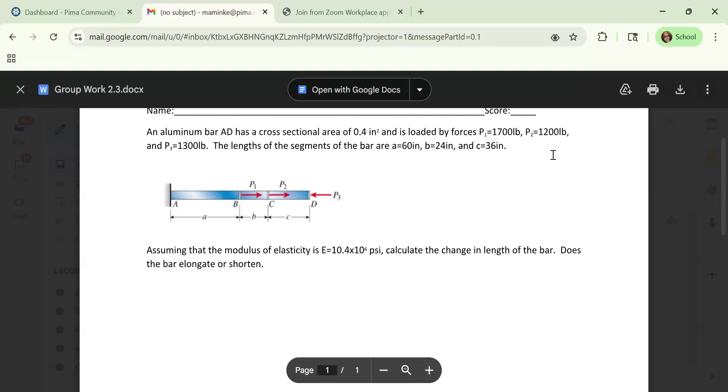Okay, I'm gonna share my screen with you, and I'll blow it up a bit. Here it goes. So I'll open a Dropbox for this. You can work on an individual piece of paper or you can take a screenshot of it.

Right, so this is where we left off last week. We do have a quiz today on 1.8. And then, as I said, we have a sample exam that'll also count for group work.

Okay, so the in-person exam will be Thursday during class, so y'all don't need to log in Thursday during class. Okay, the review session.

Did I give that to you last week? Yes. I'm so confused. All right, I revised it actually. I couldn't figure out why I had a half dozen copies of it.

You added prismatic segments. I added prismatic segments, yes. I added 2.4, which is what we're gonna do today, which I will be honest is not straightforward, so we might want to not have that on. And I added thermal misfits. Misfits is the wrong word. Yeah, no, misfits is the right word.

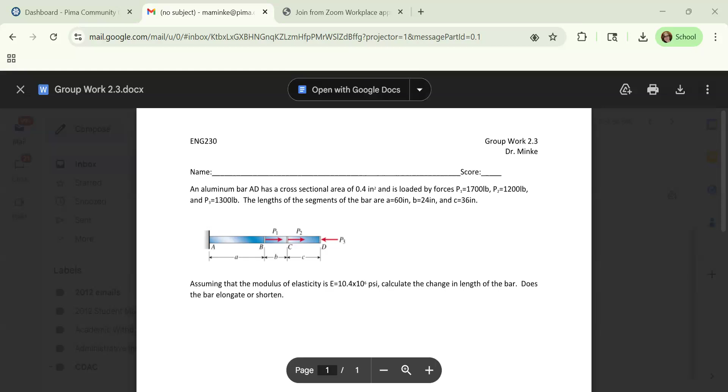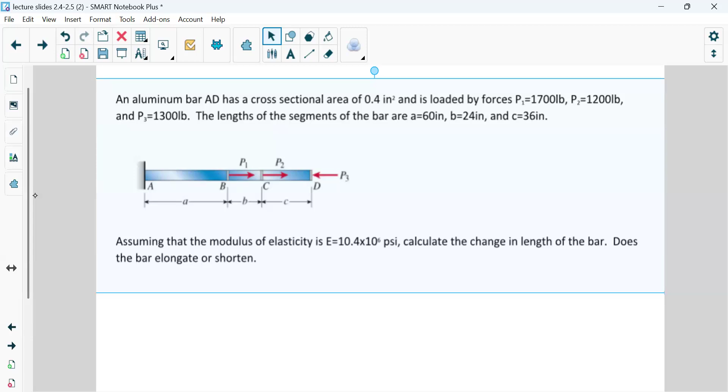So we have a non-working pen. 60, this one is 24, and this one is 36. I think that should be green, and it should have a much smaller thickness.

All right, so we're given the modulus of elasticity as E. Why is it E and not G? Because it's axial, it is not a shear force, right? And we also don't have any wiggle room with this.

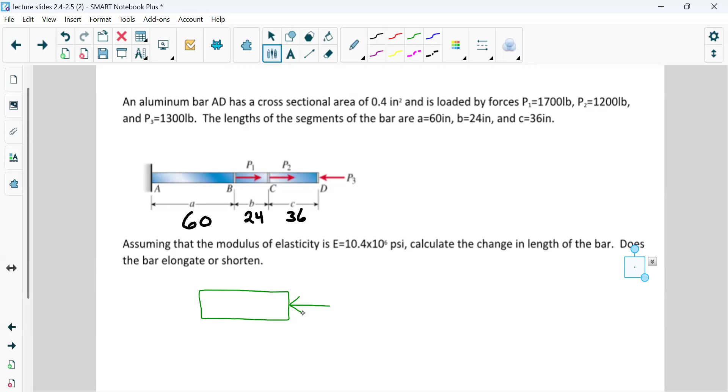So we have a wall on one side here at A, and then we have these forces coming in at B, C, and D. So let's go ahead and cut this up. I'm gonna start by cutting it just short of C. So that's going to give me P3, which is coming in at 1,300 pounds.

By the way, yes, this was a question yesterday. If it's pounds, do we multiply by G? No. Do we divide by G? No. Okay, don't ask that question when you're taking the exam.

It made me grouchy. All right, and we know that this distance is 36. So let's go ahead and figure out our first delta. So our delta then is going to be, and that's over EA. So we're going to have 36 times my 1,300 divided by my elasticity.

And let's double check units. What were those numbers given in? Oh, they're given in inches. We're cool. Okay, and what else goes on the bottom? Oh, the area. Just 0.4 inches squared. Okay, thank you, I didn't see the number.

All right, so what ends up being my delta then? Why isn't the P2 acting on that one? Because I cut it right before the P2, like just a hair's width before the P2.

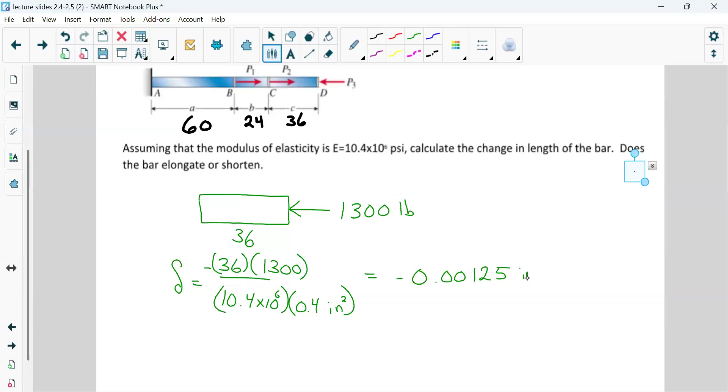All right, and that's in inches. So I don't know if you heard Kate's question or not. He said, why aren't you including P2? Because I am cutting it a hair width away from P2. Oh, Ellie says she's in her redemption arc. All right.

So now let's look at what's going on from B. Does that make sense? We're gonna have to have P2 and P3, and that's going to be, okay, so now we're cutting it. We aren't gonna see the P1. All right, so our first cut was here, our second cut is like right there, it's before it sees the P1. So if it's before it sees the P1, we're gonna have P2 and we're gonna have P3, and we're gonna have to add B and C together.

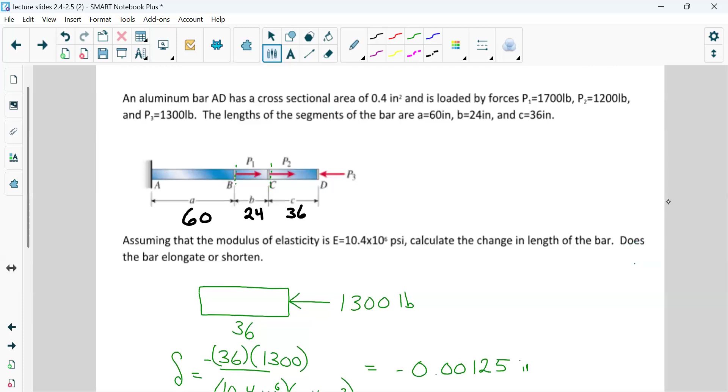I don't know who screwed this up, but all right. So we draw this out, and do we change our diameter? No, we're not changing our diameter. All right, so I have 1,300 here, right?

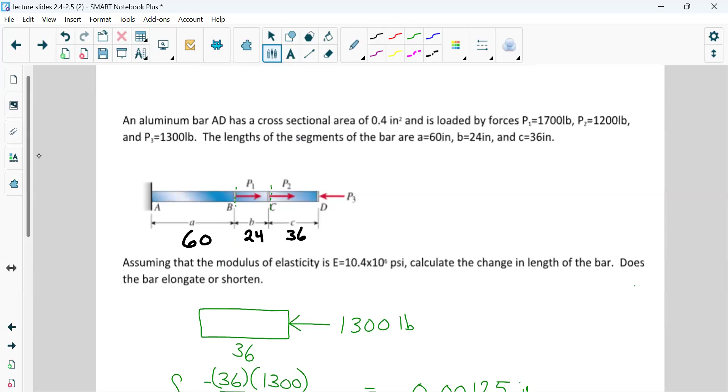And then I have, well, hang on, we're just looking at the B part. But B is still seeing what's coming in from the other segment. So we're gonna have 1,300 here, and then this one is then going to be P2, which is 1,200, right? Correct. So my total force on this is then going to be 1,200 minus 1,300, so that's then going to be negative 100.

We add the length of, we're only looking at the B segment, so you do the 24 inches. All right, there was some mental math there, that always makes me nervous.

So my delta is then going to be 24 times negative 100, divided by 10.4 times 10 to the 6th, times 0.4. And what comes out when we do that? Forget the 24. Negative 5.769 times 10 to the negative 4th, question mark? No question mark, that's good. That's good? I got it.

Alright, I want you guys, so it's to the negative 4th, correct. Negative 5.769 times 10 to the negative 4th. Jesus, oh, I rounded it up, sorry. Good, but do I have this right? 10 to the negative 4th, 1, 2, 3, 4, yeah, okay.

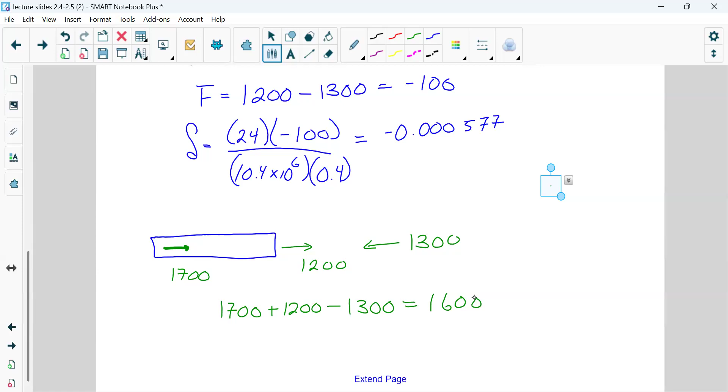So let's go ahead and find our delta. Our delta is then going to be 60 times 1600 divided by, got the E, 10.4 times 10 to the 6, times 0.4.

0.02308 is what Ellie's saying online. Correct, Simon agrees.

All right, so let's go ahead and add these guys up. We're now going to sum our deltas, but you say they're calling it L in the book? In the book, they had it as the summation, N sub I times L sub I over E sub I times A sub I. The equation you're doing comes out to be just delta. Okay, so let's see, we're gonna have...

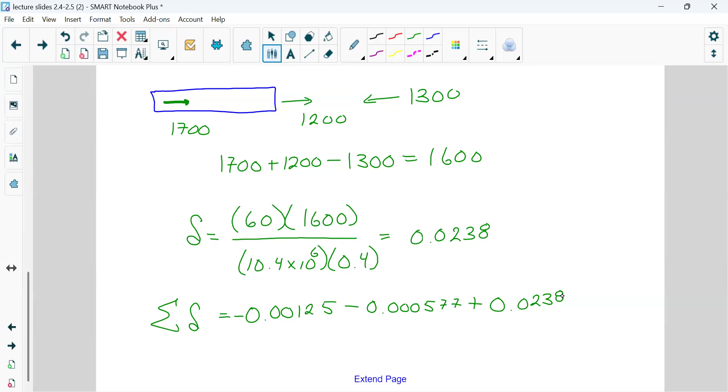0.00125, negative. That one's negative, yes. Then we're gonna have negative 0.000577. And then we're gonna have positive 0.0238. When we add these up, then we're gonna get our final answer.

Believe it's 0.01125, something close to that. Your answer for the third section should be 0.02307 or 0.02308, not 0.0238.

Zero point zero one one two seven three one. So what do you come up with then? 0.01127. Oh yeah, that's right.

Okay, now, is this gonna be an elongation or is it going to be a shortening? Elongation. It's gonna be an elongation. Why? Because it's positive.

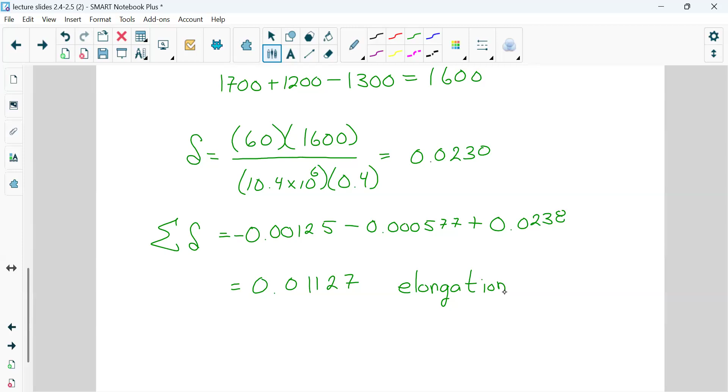All right, how are we feeling about these problems? That didn't go as smoothly as I thought it would, but how are we feeling? Feeling better, feeling better. Just gotta get down the first cuts.

All right, so I believe we talked about the non-uniform conditions, correct? And these are all actually loaded. I wanted to do an example where we change diameters. We did not do one of those, did we? Did we do one with a different diameter last week? Yeah, the example we did last week in class had a different diameter involved. Okay, cool, I just wanted to make sure of that.

Okay, so we started talking about how we deal with things when they're not uniform. And I will be honest, this is the part that I think is the hardest part of the class. So we're gonna start in on this. My guess, and I could be wrong, we might get through this and Simon and Ellie go, oh, this is a joke. They're not, they better not. And therefore you can go ahead and put it on the exam.

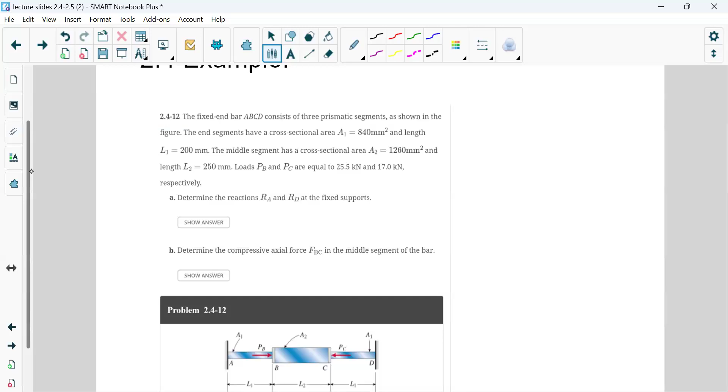Okay, so we're going to look at a problem and talk about what the issue is. If we look at this problem here: fixed end bar, 3 prismatic segments. The end segments have the following cross-sectional area and length; middle, PB and PC are equal.

Now we're going to determine the reactions at the fixed support and the compressive axial force in the middle. How is this different? If you just look at the picture, how is this different than everything we've done to date? There are 2 fixed positions. So now we have 2 fixed sides, and because of that we're going to have to treat things a little differently.

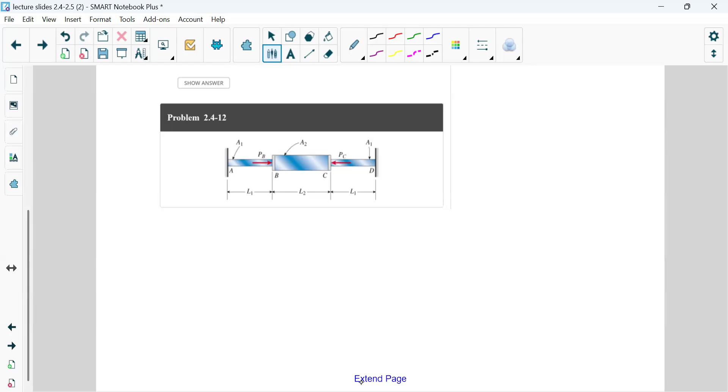So when things are statically indeterminate, what is going on here? Let's take a little step back. If you think about statics as a class, what do you do? Well, you do your free body diagram, and then you have your equilibrium equations. That type of information is then not going to be sufficient. We use it, but it really doesn't tell us about our internal reaction forces.

And when I say internal reaction forces, back in statics we'd cut it... we'd bring up the wrong slide.

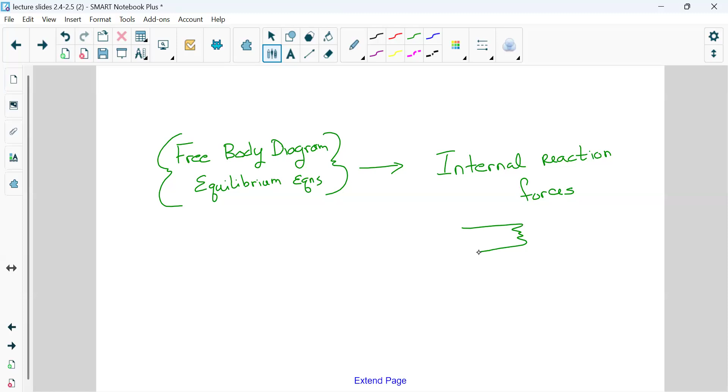And when you guys get to that chapter, what chapter is that in? 7? You just took the class. That 7 sounds good to me, somewhere late in the class. It's late in the class, yes.

We did this type of analysis, but really that type of analysis is shortchanging us on what's really going on. So statics is basically not enough. Instead, what we're going to need to do to figure out these internal reactions is combine our statics with our deformation information.

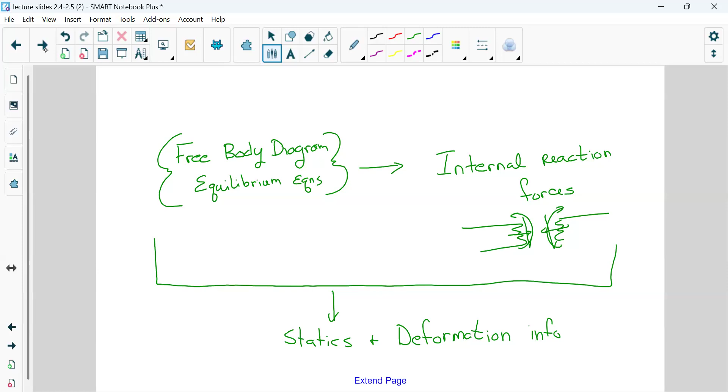That was pretty easy on the last one, right? Because what was happening? It was just sort of hanging out there. But now we have an issue that it's no longer hanging out there. We now have walls on both sides. So if it deforms too much, what do you think is going to happen? It's going to collapse. It's going to pull the walls together, or it's going to bend for a bit, but it's going to fail, correct?

So the way we're going to handle this is we're going to remove a wall, for lack of a better term. We're going to then do what we just did, and then we're going to use superposition to put the wall back. So that's the big picture of how we're handling this.

I only have one example of this, which is really not ideal of me because I think this is the worst, well, it is the worst part. I'll pull another example up.

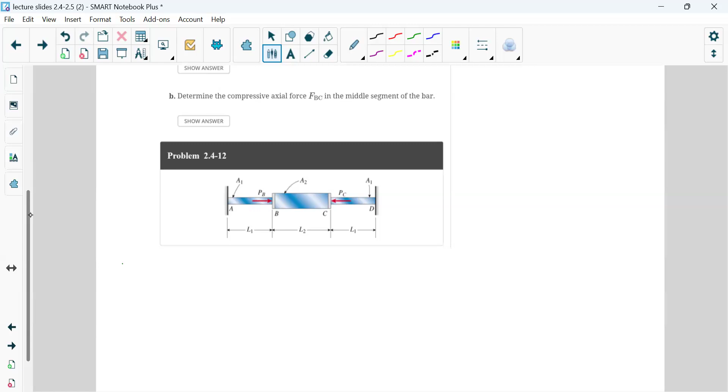So first thing is we want to determine the reaction force at RA and RD. So let's review how we find reaction forces. We are just literally going to add those forces together in order to create the reaction forces.

So if we're going to do this, let me grab the picture. We're going to do this, and we're going to start by dealing with it in terms of, if it's a statics problem, and find our reaction forces.

Whenever I see that notification, the meeting's being transcribed, that always makes me nervous, because I wonder what it thinks I'm saying. AI does not always rock. Correct? Who found that out the hard way, Simon? I don't know, who did it? You did. Did I? Yeah. Did you get a lecture in statics that was not statics? I suppose that's right, isn't it? I was not a part of that, so that's why I don't remember it. You were not part of it? Yeah, you were. I don't think I used it, no. You weren't there that day? I was there that day, but I didn't. No, you didn't use it. The instructor used it. Oh yeah, no, okay, yeah, that's for sure. Yeah, that was pretty bad. I'll say about that later.

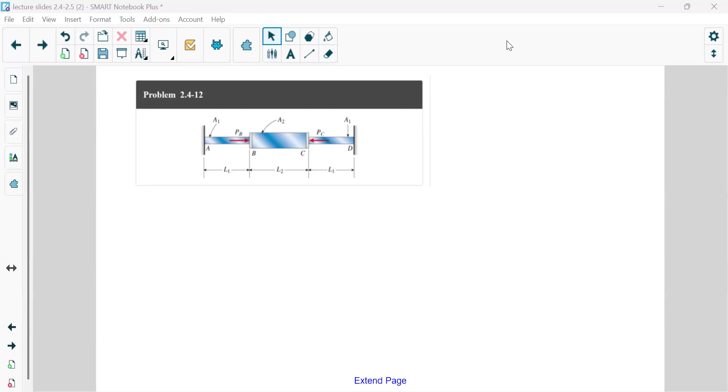All right, let's take a little step back and talk about this for a moment, because that one's a little complicated. If I have a wall and I have a beam and I have a wall on the other side, can we get our two reaction forces? Let's say there's a point load in here, we'll call it 100 newtons. How would I then determine my reaction forces? This is a statics review.

It can be impressive, it's just sometimes it doesn't understand. It's a long, bizarre story. All right.

Okay, so I've got this force in here acting axially. Then we are going to have reaction forces, aren't we? So we're going to have an axial reaction force. Let's call this A. And we're going to have a reaction force here, and we will call that one B.

All right, so if we are looking at this, really, how many equations do we have? We only have one equation. We have no forces in the y direction, correct? So we can only sum in the x direction. So what happens if we sum in the x direction?

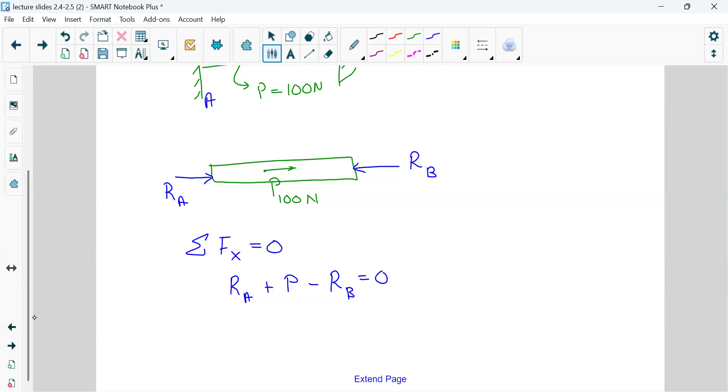So we are going to instead look at this, and it's called the flexibility or force method. But we're saying we need another equation to be able to figure this out. So what we're going to go ahead and do in order to figure that other equation out is we're going to release the structure, right? Let's do it.

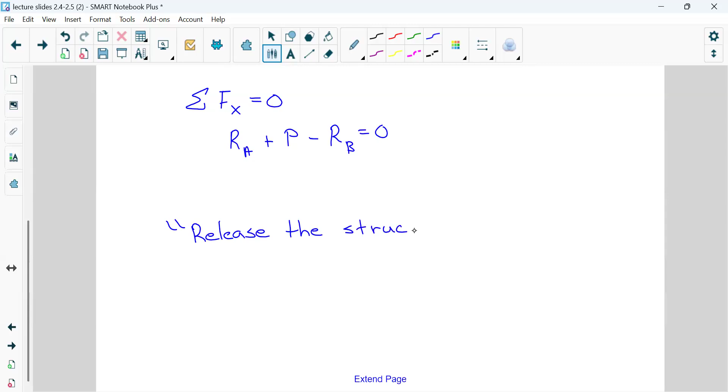So if I'm releasing the structure, this was the problem we were just doing, right? We will still have a wall here, but I'm going to take a wall out. And let's say the length from here to here, this is going to be A, and from here to here, this is going to be B. This is still my force, P.

Where is the deformation going to occur? In section. But the total deformation, it's going to expand which way? The force is going this way, the force is positive. This is going to push out like this, isn't it?

We agree? If this is going to expand, it's going to push out this direction. All right, that actually gives us our second equation. Because what we've been doing is we've been saying, the total deformation is going to be the deformation from A plus the deformation from B.

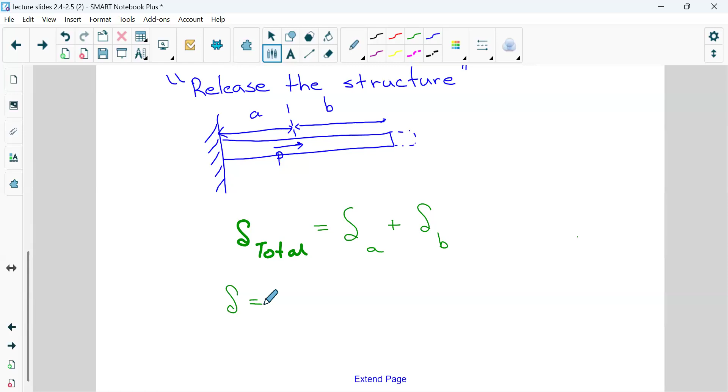So if I release the structure, this is where this then becomes handy, right? We know how to calculate delta. We just did it in our group work, didn't we? Right? So what is it? Oh, it's over EA. There it is. PL over EA.

If this thing is not released and smashed between two walls, is it physically going to deform? No. Right, okay, so that means that this total has to equal 0.

If I use this equation here, we're gonna have our reaction force of A happening here, aren't we? Right, so if we look at that in terms of our reaction forces, this one is then going to be little a P over EA. This one is gonna go the other direction, and it's going to be B R sub A over EA equals 0.

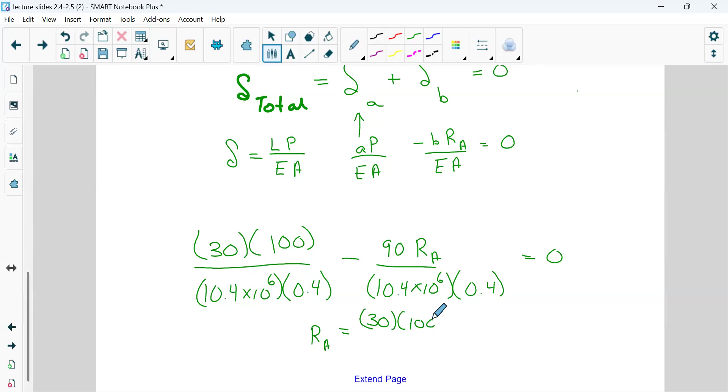All right, so can you figure out RA is, then going to be, 30 times 100 divided by 90. Did you guys all see? Simon said he saw, Kate said you're crazy. RA is acting, will be acting on the total length.

P is only acting at 30. So because of that, I needed to add those two numbers together. That's where the 90 came from -- it's the total length, and you can arbitrarily pick that point of where you're cutting it. So this P is only acting on this side, so to speak. RA is seeing all of it.

So you don't arbitrarily -- you typically pick the point where the force is given. Okay, does that make sense? Yeah. Okay, because that P, and we actually haven't talked about this or seen this before, this P is internal, so it's experiencing an internal force here.

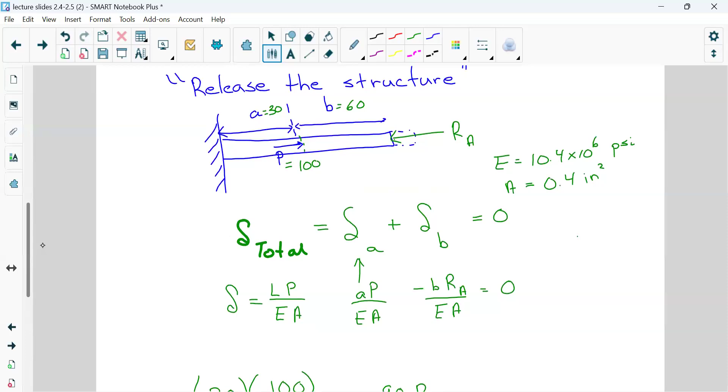All right, did you run the calculator for me, Simon? I got 33.34 newtons. It can't be in newtons. Let's run it in pounds. I might have put that as 100, but if the bottom is in PSI and we're running everything else in inches, then let's make this 100 pounds.

Okay, all right, now let's go back to our statics problem. On RB now -- exactly, oh look at that. Because what did we know if we took -- well, we've got the wall here, we've got the beam, now we have the wall here. And this is -- I think I changed units on you. This is P equals 100.

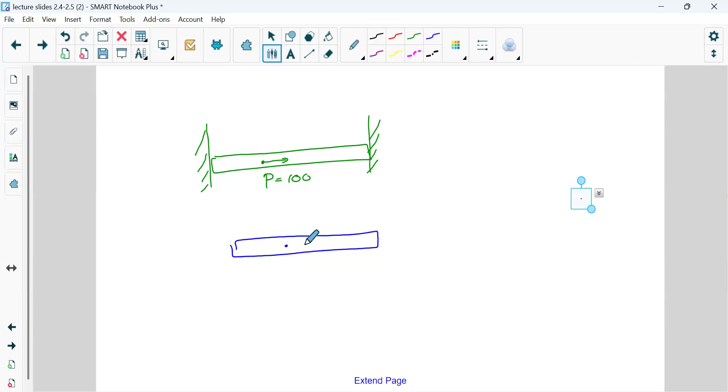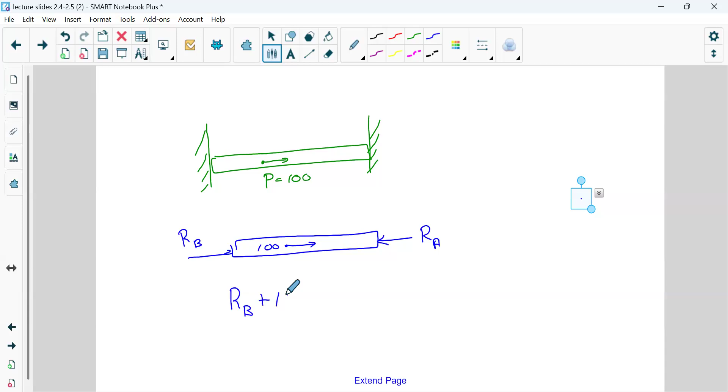All right, so if I draw this as a free body diagram, what's going on here? We have P here, we have RB here, and we have RA here. This P is 100, so that means now what do we have? We have RB plus 100 minus 33.34 equals 0.

That makes sense -- okay, I'm sorry, my brain had to take a moment and think about it. What does RB equal? These are probably because I put in bad numbers, but what does RB then have to equal? 133.34.

Well, so in the first way that you drew it, RA is on the left side, pointing in -- I agree with that. Oh, actually, I flipped this around. Sorry about that, RB -- should just give everyone extra credit today. But then it wouldn't be 33 anymore, would it?

It would still be 33. RA plus 100 minus RB, and then you bring RB over, that would be 133.34. And I was worried about the negative, which actually fixes it. So, does it? RA plus 100 minus RB equals 0.

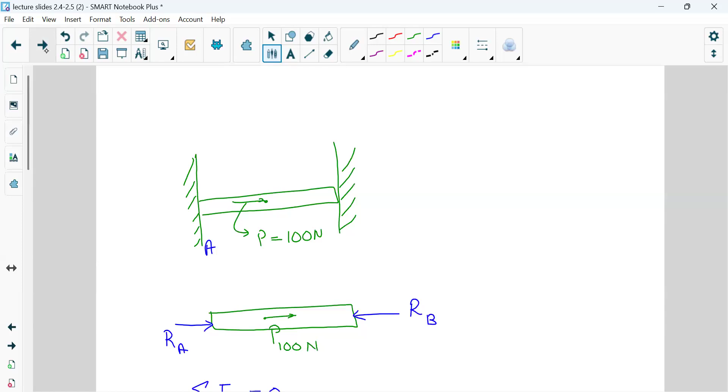We found RA though -- oh, we found RA. Yeah, did we? We had found -- well, in the example, you put it as RA. Stay calm. Okay, so RA, RB, RA plus P minus RB -- we took away a wall. We actually took RB away, solves for RA, and we solved for RB, because that one's pushing. So our RA is 33.34 newtons.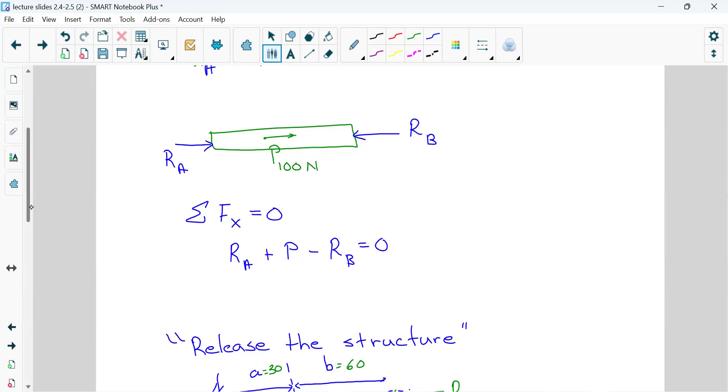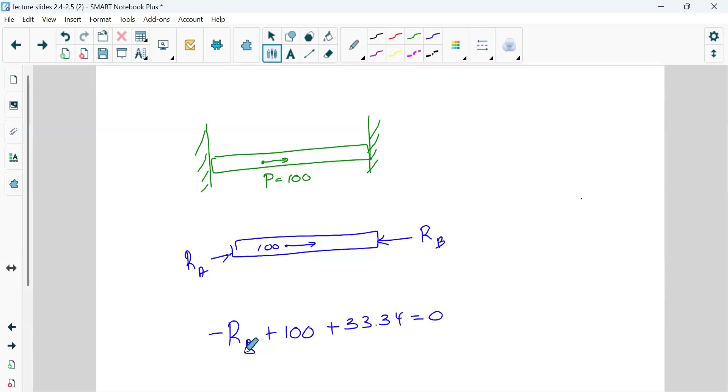So then it would be -- oh I see -- the 100 plus 33.34 minus RB equals 0. So RB is then going to be 133.34 newtons.

All right, so in statics, we did what? We took moments in order to be able to solve stuff. Now we're like, well, we don't have a moment, so we're gonna have to do things a little differently. And because of that, we're gonna use these statically indeterminate structures, okay? Basically, we do what we just did, except we remove one wall in order to be able to get an answer. Let's do another one.

Should we do another one? Yes, please.

Oh, we can go back and do 2.412, since that one is prepped. Do we need a break? Actually, I need a break. All right, so when we come back, we will do this problem. You guys get your 10-minute break. When we come back, we'll do this problem and see if we want to do a third one on top of that. My guess is we should probably do the problem out of the sample exam I gave you. Or we could do a different one, 2.49.

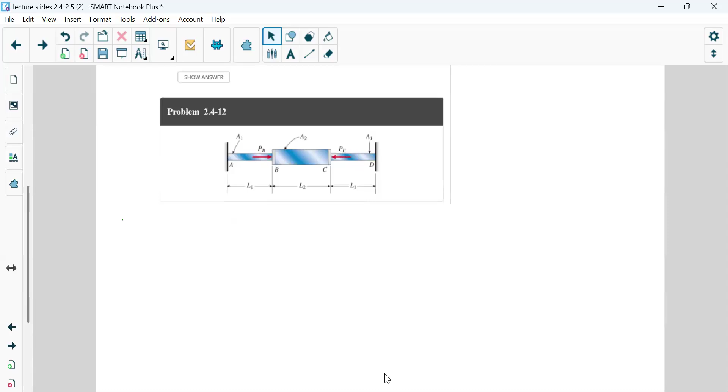All right, I want to make sure I already did grab it, okay. And because I did that other example, let's make things more readable, there we go, put that there. Then the lecture notes will actually flow for the people who are off on the field trip. All right, so let's go ahead then and put this together. So I approach this and I say, I'm a statics student, I can do this.

All right, so we start off, we have A, we have our section B, we have our section C, right? And then we have our walls. So this is PB. This is then my PB force, and this here is PC force. There are 2 reaction forces on the edges, right? I always draw reaction forces as going in, but we're going to end up with a negative answer, and that's okay. So we have a reaction force RA, and we have a reaction force here at RD.

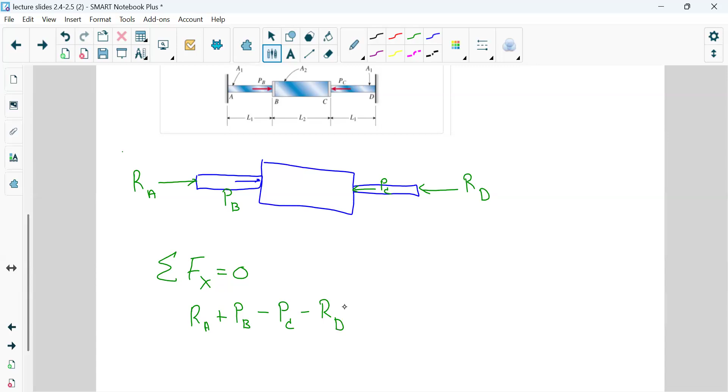Right, knowing the fact that we have all been successful in statics, what are we going to do? We're going to sum our forces in the x direction. Guess let's just go with it. So that means we're going to have RA plus PB minus PC minus RD, that's all going to equal 0.

We are given PB and PC. PB is 25.5 and PC is 17.

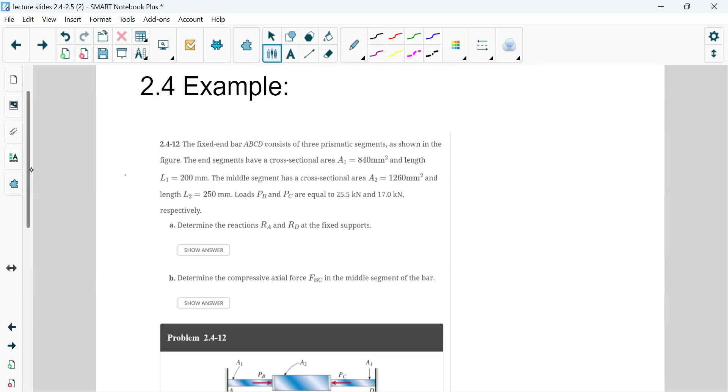So we're going to have RA plus 25.5 minus 17.0 minus RD equals 0.

We have a problem, that's our only equation. We can't take a moment. We have no equation in the y direction because we have no forces in the y direction. But we are no longer statics majors, we're much more sophisticated than that. We are solids majors. So what else do we know about this?

Our deltas. So our delta AD, which would be then the deformation of the entire bar, that's going to be the deformation of each of the segments. So we're going to have delta AB, BC, and CD.

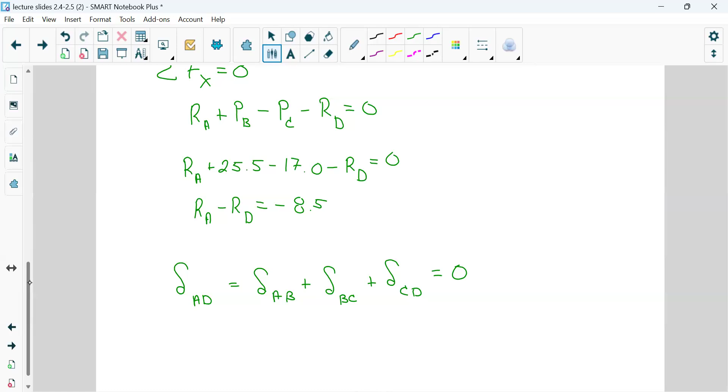Can we do it the same way we did it the first time? Sure. All right, which wall are we going to leave alone? Let's do A, we're going to leave A alone. All right, so these are going to be our 2 equations. The decision was made to leave A alone, so let's go ahead and put this on this sheet.

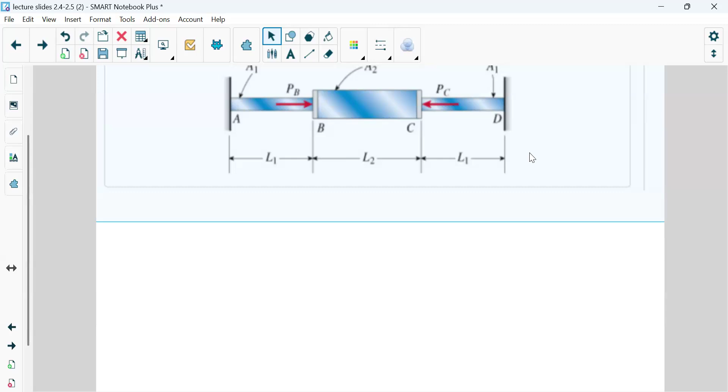So we're going to remove the wall at D. All right, if we remove the wall at D, that looks fuzzy to me, make it a little smaller. We remove the wall at D, let's see what we have left. All right, so we're still going to have the wall at A.

We are then going to have this segment here, right? And we then are going to have this bigger segment. So now we are changing length and diameter. If I'm changing length and diameter, what is that going to affect? Okay, it'll affect the delta. How will it affect the delta?

Cross-sectional area would be different. The cross-sectional area is going to be different for each segment. I have a question, cancel out the bottoms? We can't cancel out the bottom on this one. No.

All right, Dr.—Monique, I have a question. Can you hear me? Yeah. Why are we removing the wall? We're removing the wall because if we remove the wall, we can then figure out what the delta—we can then use the delta information to figure out what RD is.

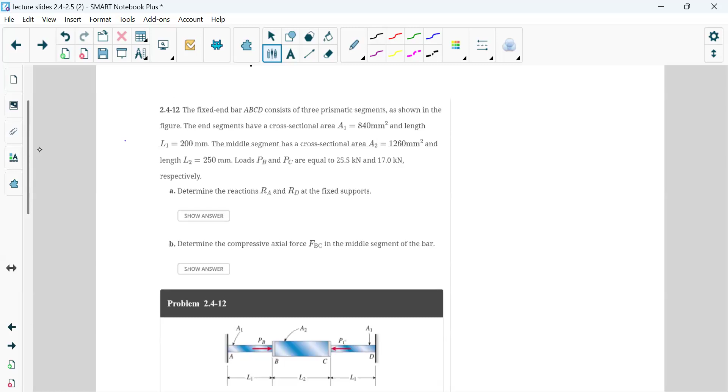Okay, so if we go back one, right? If I want to find these reaction forces, that's what it said, determine reaction forces. Did you get a picture of this? Russell, I think you're talking. Yes, yes, I got the picture. Okay, you got this picture.

So if I just go back and do statics, I'm going to be screwed up, aren't I? Because I have—yeah, that's because we have two unknowns. I have one equation, I have two unknowns. So we're going to bring a second equation into play, which is the fact that there is going to be a delta from that axial force, right, along all three of these.

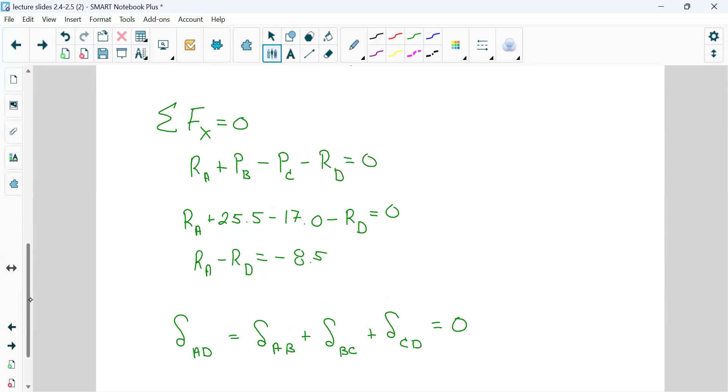Okay, and then we can pick which wall we choose. Is it going to matter if we pick the other side, or is it not going to make any difference? No, it's not going to matter, it just allows us to get rid of the RA force basically, so we can figure out what RD has to be. And if we pick a different wall, would it make it easier, like how we used to do a moment? No, it's not going to make any difference. Okay, thank you. The walls behave the same. All right.

Okay, so let's go ahead and...

Let's figure this out. I guess it makes sense to start from RD. We know in general, delta is going to be PL over EA. By the way, if the area is varying along the length, we could set this up as an integral. I don't believe you have any problems like that, but just as an FYI.

All right, let's look at our first segment. This is acting here, PC is acting that direction on C. So my cut is going to be just this side. So my delta, we'll call it delta DC, is going to be RD because of what it's seeing.

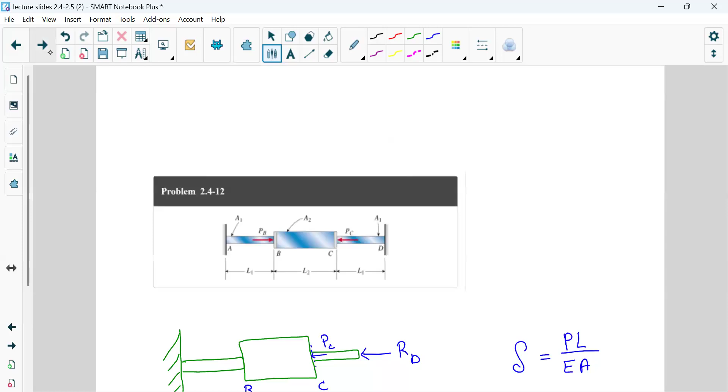The length of that segment is L1, which is 200 millimeters. So L1 is 200 millimeters, A1 is 840 millimeters squared.

Are we given E? No. So we're just going to let E float around the equations. Actually, it won't matter because E is going to be the same for all segments, so we'll assume that and it's going to disappear for us. And the A for A1 is given to us as 840 millimeters.

You guys giving each other grief?

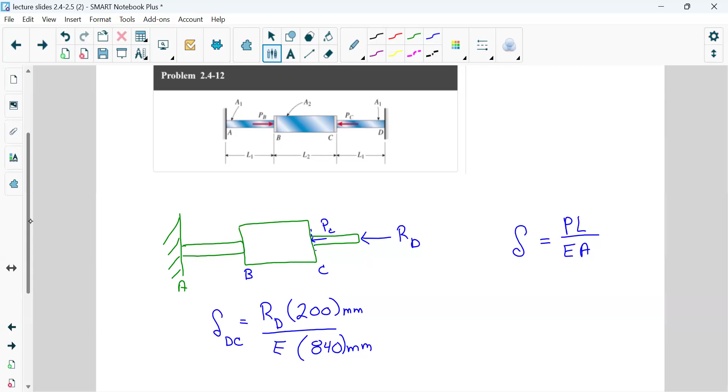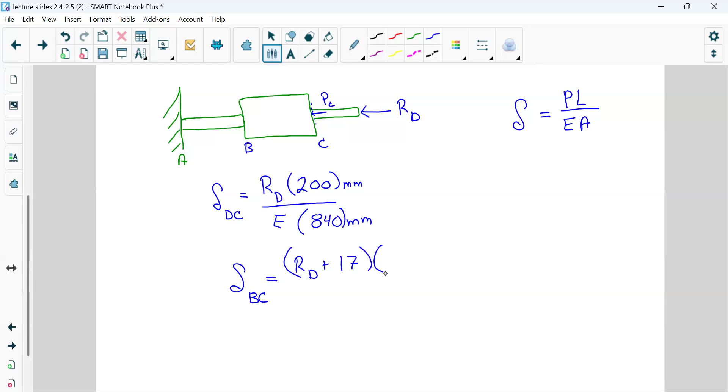All right, let's now look at the BC segment, but we're going to cut it so it doesn't see PB. Now the forces we're going to see are RD plus PC. PC, that was given to us, was that the 17th? That's it. Okay. Then we've got the BC length, which is 250, and 1260 are the two numbers we're going to be dealing with.

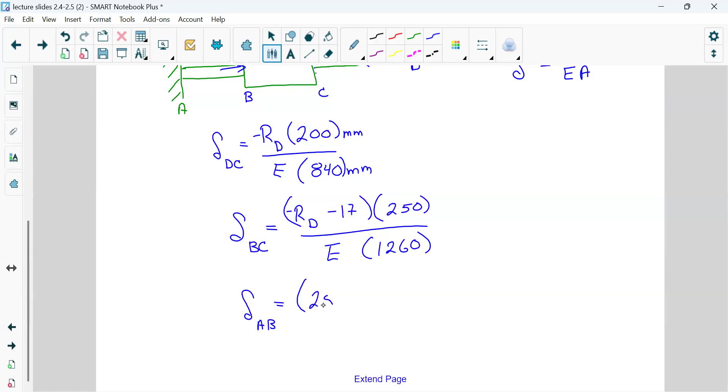All right, our final one is going to be AB. So AB, oh, this is negative, and this is negative too, right, and PC is negative. All right, PB is going that way, correct, so that one is positive. So then we're going to have 25 minus 17 minus RD, and then that's going to be, we're back to the 200, aren't we? Yeah, 200 over E times 840.

All right, these all have to add up to equal what? They're going to have to add up to equal 0. So we're going to have RD—put in 200 divided by 840 for me. 0.238, divided by E. All right, then 250 divided by 1260, 0.1984, divided then by E. 17 times 250 divided by 1260.

Which one, sorry? 17 times your .198. 17 times .198 is 3.373.

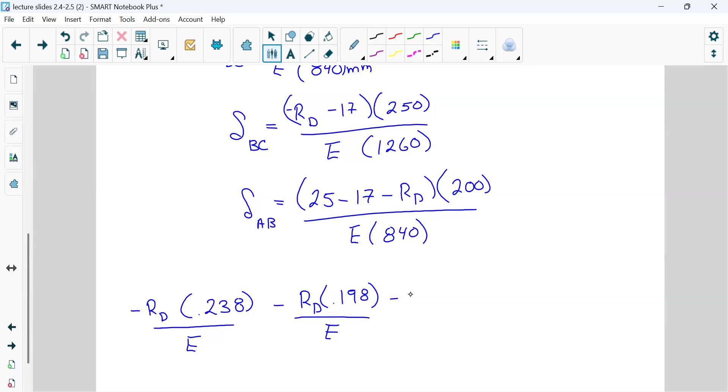All right, last one: 200 divided by 840. It's 2.023 or 24. 2.04. 2.02. Try it again. 2.024. That doesn't make any sense to me.

200 divided by 800—well, yeah, and then you multiply by the 5. Oh, you're doing the 25. I was doing the RD. Oh, okay, we're not communicating. All right, so times the 25, that's a plus now, 2.024 divided by E. All right, now that times the 17.

Hold on, I think disregard all my numbers. I'm doing it totally different, because I'm calculating each delta individually. And then you're going to add them all together.

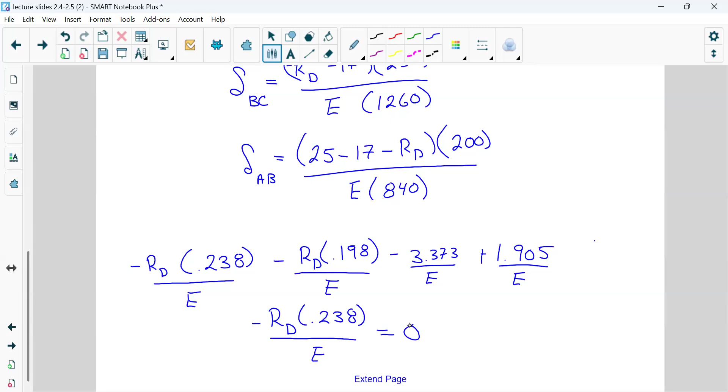Now the reason I was sort of talking to myself, I said well, just run it with E because that has to equal 0. So since that has to equal 0, if we multiply through by E, the E goes away. All right, so we end up with what?

Let's start here: negative RD, please add 2.38 plus 2.38 plus 1.98. So it's 238, 198. Yeah, 6.674. All right, 0.674. So to answer your question, Ellie, we're not adding them together because we've got different areas. All right, then we need to take negative—that's going to be negative 3.373 added to 1.905.

She just did the alphabet.

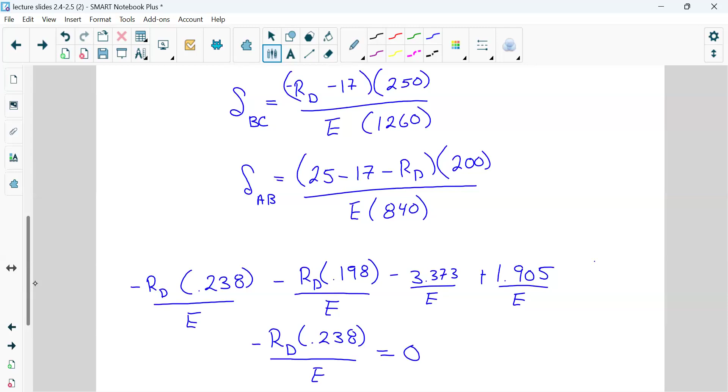It's gonna be negative 1.468. Cool. What was the question? Determine the reaction force. No, there was a question over here. Maybe I'm not good with calculators either. Oh, okay, everything's falling apart over here. Kate, with me, I swear. No, I didn't get that.

I got 2.456 for your RDs put together. Your coefficient RD, you added 238 twice? Yeah, 238 twice plus 1.98. You didn't get 0.647? 0.6, you didn't get 0.674? Plus 4. So I'm looking at 238 and 238. That's going to give me 4.6.

You guys are going to make me do mental math. So now I have 4.6. Is that not the same? Yeah, because 1.98 is 0.198, my friend. That makes sense. Okay.

Oh my god, they're purposely causing mass confusion in here. 1.468 divided by negative 0.674. It's going to be negative. That's okay. All right, what's the answer? So negative 2.178. Thank you.

Is it over? It's over, sort of. Oh yeah, we still gotta figure out what, but I'm very happy with that answer. The author did it a completely bizarre way and he got the same answer.

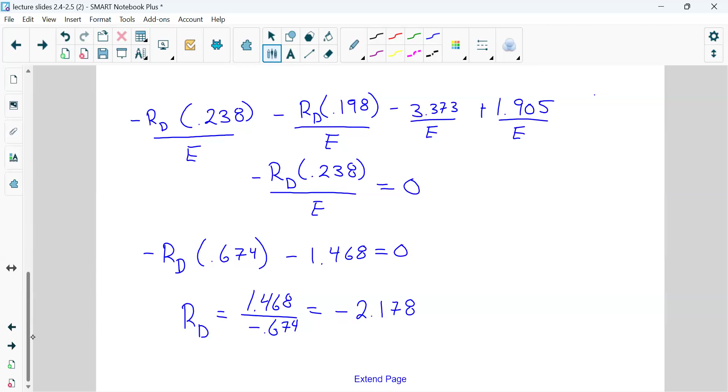So let's go back to our original diagram. Small segment, fat segment, skinny segment. I drew it as, and then this one, drew it as compressive. I drew it as compressive. I should have drawn it in tension. So this is 2.178 kilonewtons.

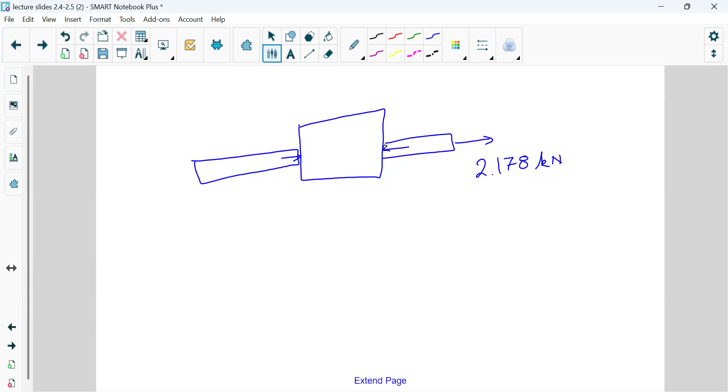This one here, is this the 17? Yes. 17. This one's 25.5. All right, I drew RA like that. It's gonna be, or no, I drew it the other way, didn't I? It's gonna be negative also. All right, so I drew RA as a compressive force.

If you remember back in statics, when we ended up with a negative number, it means our free body diagram was wrong. Okay, so this is going to be RA plus 25.5 minus 17 plus 2.178 equals 0. We're back to summing our forces in the x direction. So that's going to be 8.5 plus 2.178. So it's basically going to be 10.6.

Right? Did the calculator confirm that? That's cool, I'm giving up on the calculator tonight, we're just doing math in my head. 10 point, what did I say, 10.6? Yep, I guess it'd be 7. 6, 8, close enough. Okay. You sure? Kilonewtons. Smack him. All right.

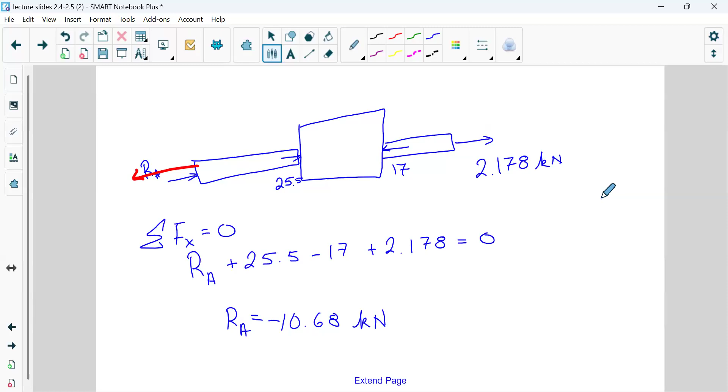All right, so let me redraw this free body diagram the way it's supposed to look. We'll go back to blue, and tell it we want it skinny. I need to figure out how to set that. All right, so this is what we have.

We know this is going this way. What did we say it was? 10.68? Wouldn't it be, we said it was in tension, wouldn't it? Oh, you're right, it is in tension. This is in compression. All right, and this one was 25? Yep, this is in compression.

It's a little short. This is in compression and it's 17. This is in tension and it was 2.178. All my units are kilonewtons. Now, when it wants to understand the axial force at the center of BC, right? That's what it asked for.

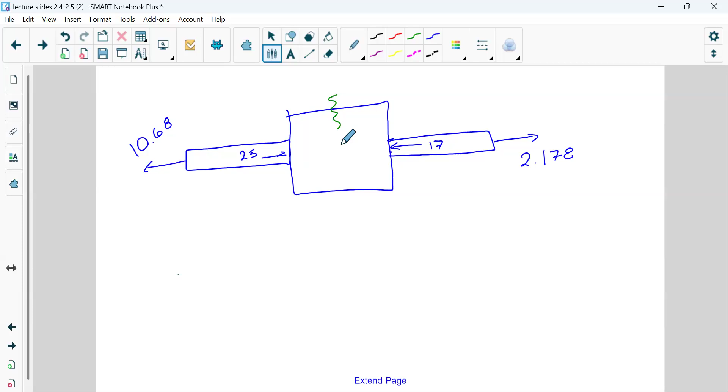What are we doing? We are back to statics. We are going to cut it. What did you say? We were getting excited to sum the forces, but I guess not. Well, no, we are going to actually sum the forces. All right. Because it doesn't matter which side we solve for, right? Cause yes, we're gonna sum the forces, we're just gonna do it with a cut in it. You've done this problem 100 times.

So I wanna know what this axial force is. So that axial force is then going to be 10.68, that's negative, plus 25, so we're gonna end up with 14 and change.

It's going to be what, 82? What'd you get? Yeah, that's right. 14.82.

All right, what's cool? Well, I guess it depends on your definition of cool. If we look at it from the other side, this is 17, this is 2.178. So that's going to be negative 17 plus 2.178. We're going to be back to that 14 number, I hope.

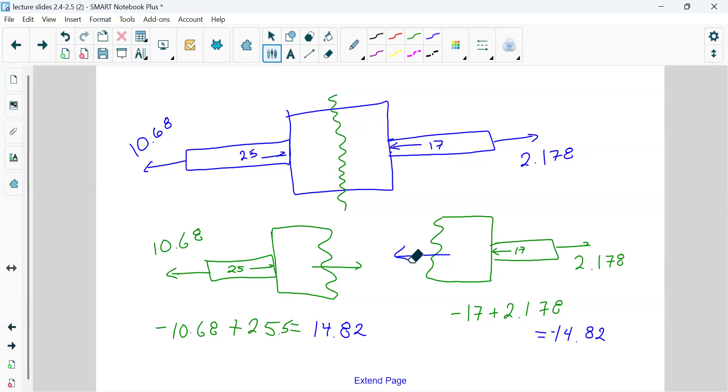And we'll have to do misfits and pre-strains next week. Not next... Yeah, I know, but I don't even know. Well, let's go ahead and introduce it because then you'll have seen it twice. All right, so let's talk about what's going on with thermal effects.

When you heat stuff up, it has a tendency to deform. Do we agree? Yes. All right, so we get a deformation when we're heating these bars up.

And that's going to cause, so you'll see this diagram, we have length and then we have delta T. The big delta T stands for temperature, and then we're going to get the big delta T as the change in temperature, the little delta T is then that expansion that we're seeing. All right, so we heat stuff up and it expands.

This is 2.5. Yeah. All right, so it's restricted. This is going to be epsilon sub T is then equal to alpha delta T.

Let's break this down and see what this is. Epsilon sub T, by the way, epsilon, that should look familiar. What is that? It's going to be strain. All right, in this case, it's going to be axial strain.

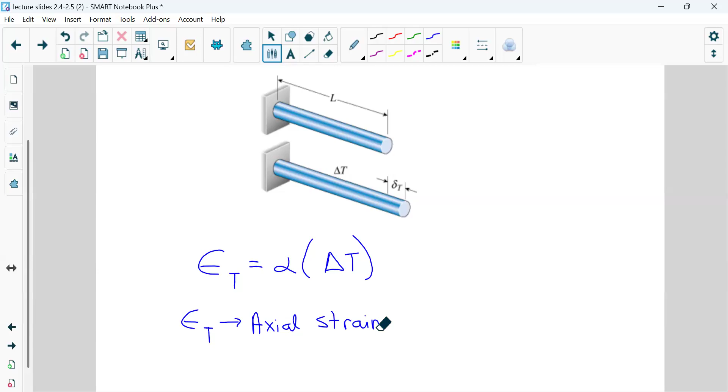We will get into things that are not axial. We'll get into radial stuff going on. All right. Alpha is the coefficient of thermal expansion.

It has to be given, because it's going to be a material property. All right, your delta T is then going to be your temperature change.

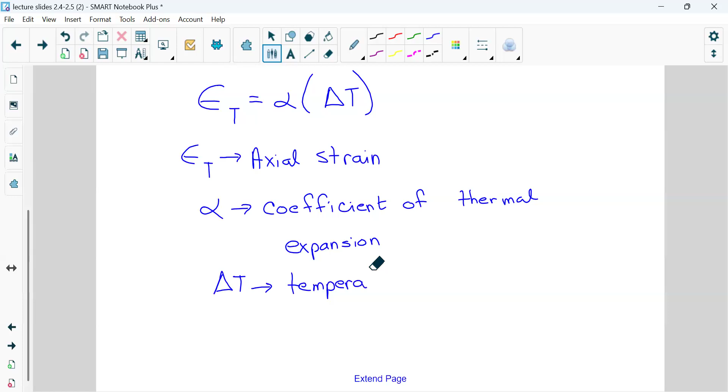I just thought of a great pre-class quiz for you guys to do. So, we'd like just a sign convention, we should say expansion is positive. Yes.

All right, they're frowning at the board. Those of you that are virtual, have you ever baked cookies? You start with a blob of dough. What happens when you put it in the oven? It expands into cookie shape, correct? Oh, but that's a different thing. Yeah, that's different. All right.

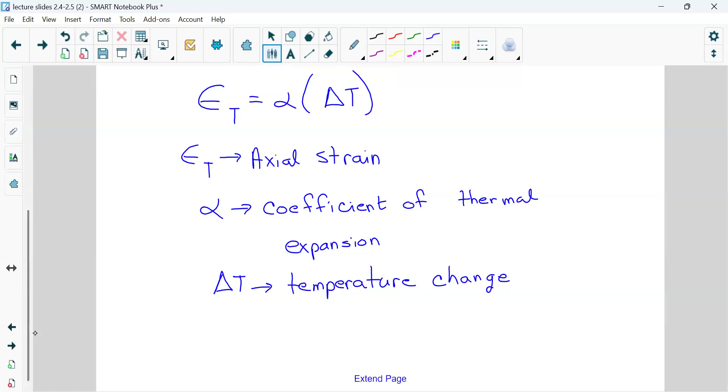So what we'll do is you'll measure the diameter of your cookie dough blob, then you will measure the diameter of your finished cookie, and calculate what alpha has to be for your cookie dough. Cookies? We're making cookies. Yeah, a lot of cookies, guys. All right, because you guys need something fun to do after your exam.

The delta T is how much that's going to be changing, isn't it? So our delta T is basically, that's going to be, right? We've been doing this sort of all along. That's going to be strain times the length. We know that this is then going to be alpha delta T.

You would assume L is some constant, it's just a long bar. When you do your cookie, you're looking at the cross-sectional area. Actually, when we do radial expansion, that's probably when we should do the cookies. We can do it here too.

All right, so these are our new equations that we're going to use. Now we've got to talk about delta T. In theory, I'm not sure, you guys have the book open—is it initial minus final or final minus initial?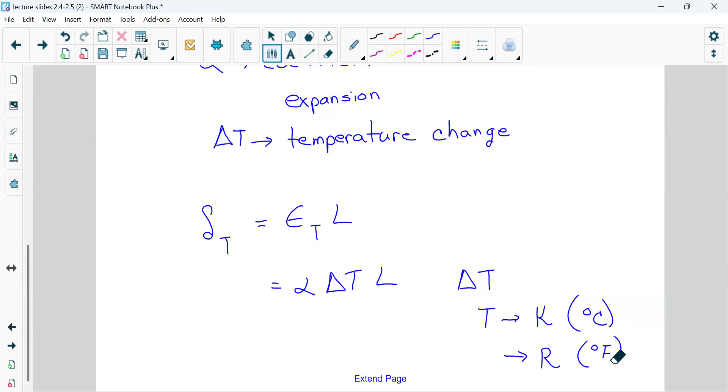Kelvin—to get from Celsius to Kelvin, you add what? 273. So to get to Kelvin, you add 273 plus the Celsius. I think it's 490 for Rankine. Someone Google it, the conversion between Fahrenheit and Rankine. Oh, I'm way off. Oh no, I'm not, 459. I was close, the dyslexia got in the way. So to go to Rankine, it's 459 plus whatever your Fahrenheit is.

Kelvin and Rankine have the same theory behind them—that's absolute zero. Absolute zero is when a crystal is perfect and at absolute zero its entropy is zero. That's how that's calculated. Entropy is the amount of disorder. So that's a little bit of thermo thrown in for color.

Therefore, if you are given the change in temperature as delta T—say I give it to you as 50 degrees C, and that's the change in temperature—you don't need to convert it, because you're just going to be adding 273 to the two numbers. So if delta T is given, just leave it alone. Treat it like it's unitless.

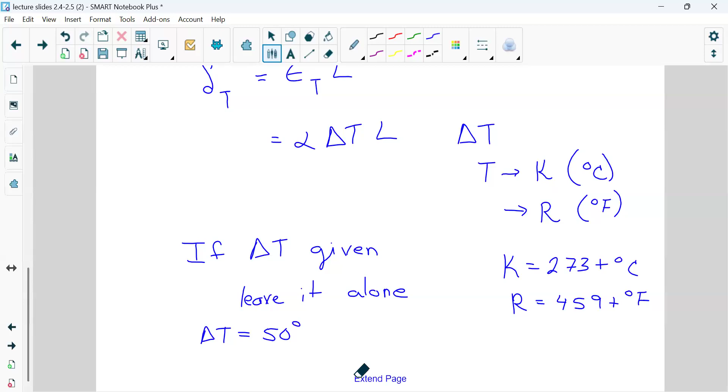Because if I'm adding 273, you can look at it this way: if my delta T is equal to 50 degrees C, and my delta T went from 0 to 50 degrees C, what's happening? I'll add 273 to both of these.

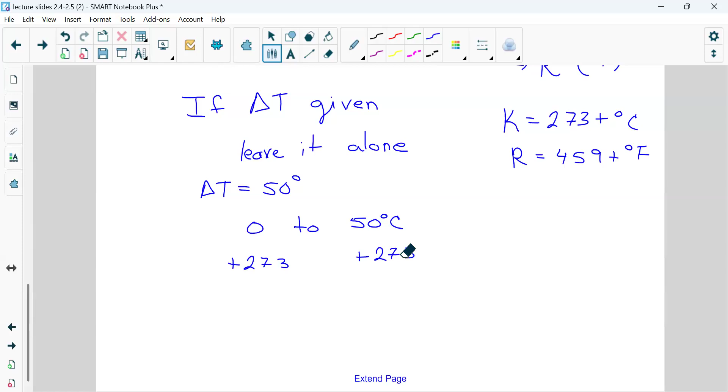So it just ends up being 50 degrees in the end. So something to keep in mind—don't get caught up in having to turn it into 273. I was trying to explain this to thermo, but they weren't listening. I had a student in thermo last week arguing with me about that, saying no, I have to convert it to Kelvin. I said, then convert it, I don't care, you're going to get the same answer. If that makes you happy, do it. It's about the change, not about the actual temperature.

Okay, alpha—we're going to treat alpha like it's a constant. That is a lie. Alpha will change as the temperature changes, but we're going to treat it in this class like it's a constant.

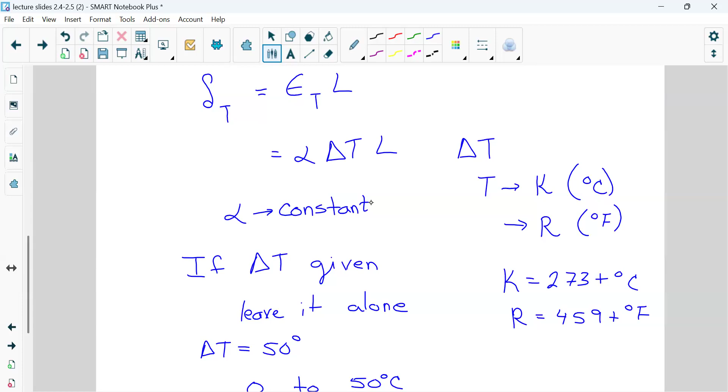So we want to figure out when the aluminum pipe—I'm thinking we might want to do something a little easier—when the aluminum pipe is 15 millimeters longer than the steel pipe. All right, so we have two adjacent pipes: our aluminum pipe, with information on that aluminum pipe, and our steel pipe. They're adjacent, it doesn't say anything about them being welded together or anything. That would actually be a really cool problem.

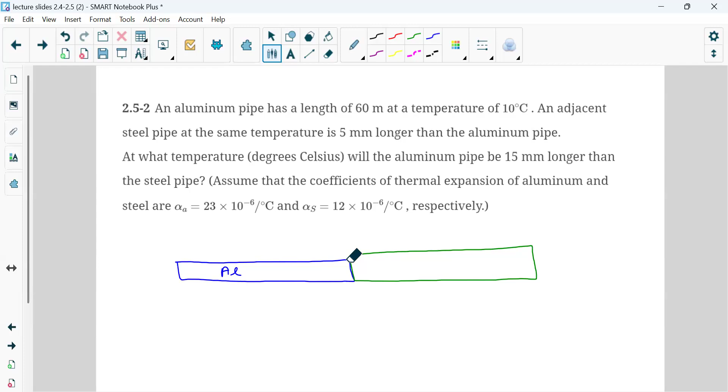All right, so let's redraw this. Here is my steel pipe. In order to visualize it better, I'm going to draw it this way. All right, we have an aluminum pipe. I wanted that to be blue.

Fine, we'll just be thick. We have an aluminum pipe that is going to expand, correct? So it's going to expand some delta, and we'll call it delta A since it's aluminum. We then have our steel pipe.

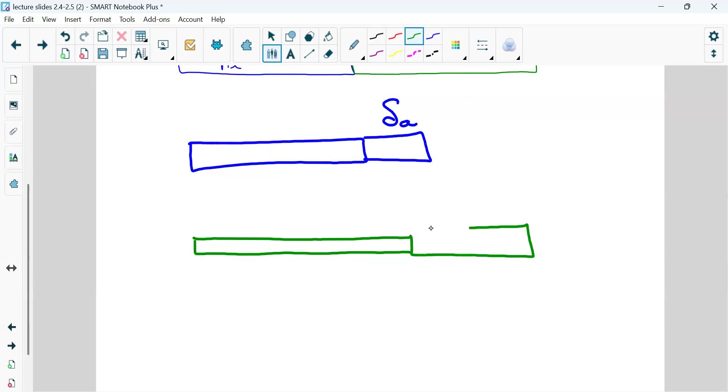When we heat up the steel pipe, what's the steel pipe going to do? It's going to stretch, so that's going to be my delta S. Both of them are going to have some stretching involved. So we want the aluminum pipe...

There's some temperature going on here, correct? So we're going to have some delta T that is causing this expansion. We want the aluminum pipe to be 15 millimeters longer than the steel pipe.

So to do that, what are we going to have? We have the original aluminum pipe length plus the change of the aluminum pipe length. We want the aluminum pipe to be 15 longer than the steel pipe, so we're going to have 15 plus the length of the steel plus the delta of the steel.

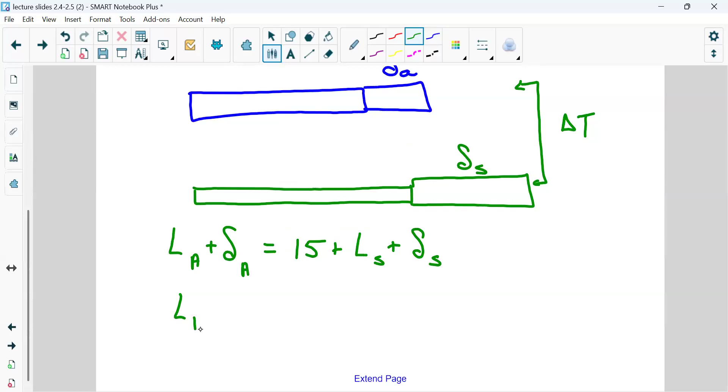Really what we're looking for is that delta T. So we have the length of the aluminum plus alpha of the aluminum times the delta T, times the length of the aluminum, is then going to be 15 plus length of the steel plus alpha of the steel, which is different than aluminum. We're not going to worry about the iron content. Delta T length of steel.

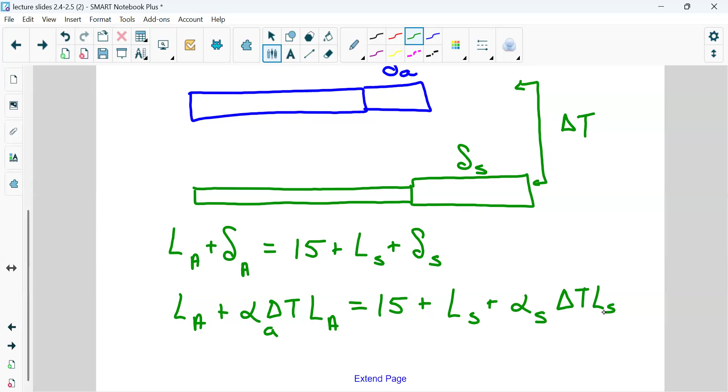Dr. Monique, if we want to make the aluminum longer, don't we have to add the 15 to the aluminum, not to the steel? No, it asks at what temperature will the aluminum pipe be 15 millimeters longer.

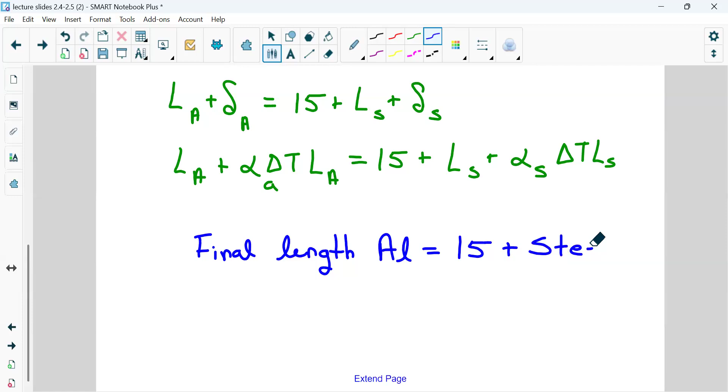So if we are looking at it this way, let's rewrite this. If we are looking at it, final length of the aluminum is then going to have to equal 15 plus the steel. The steel is 15 short.

And we've got to watch units because it's actually in millimeters, and everything else is given to us in meters. So it's really not going to be 15, it's going to be 0.015.

All right, so we're looking at the final length of the aluminum and the final length of the steel. The aluminum is going to be longer than the steel, so for them to be equal to each other, we have to add that to the steel.

We want to put this all in now and solve for our delta T. So our length of the aluminum pipe is given to us as 60 meters. Here's the aluminum information: we're at 60 meters, the alpha of the aluminum pipe is 23 times 10 to the negative 6.

The delta T is what we're solving for, and then we're going to multiply that by 60 meters. So that's my aluminum information. That is then going to have to equal 0.015 plus the length of my steel, which is 5 millimeters longer.

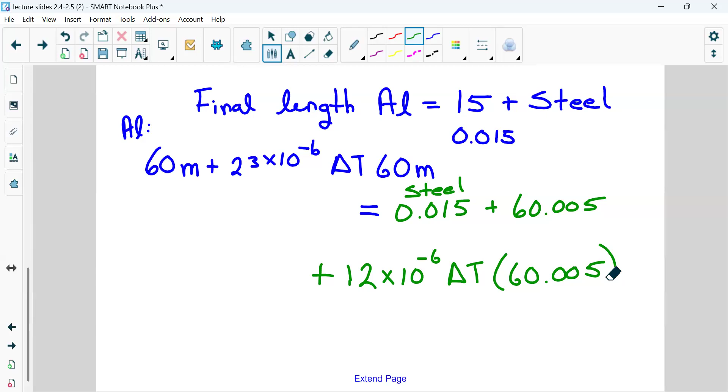All right, now if you're at this point, can you solve for delta T? Yes. All right, I'm going to write it down because I want to get the folks in the room their quiz. So delta T is then 30.31, and the alpha numbers were given to us per degree Celsius.

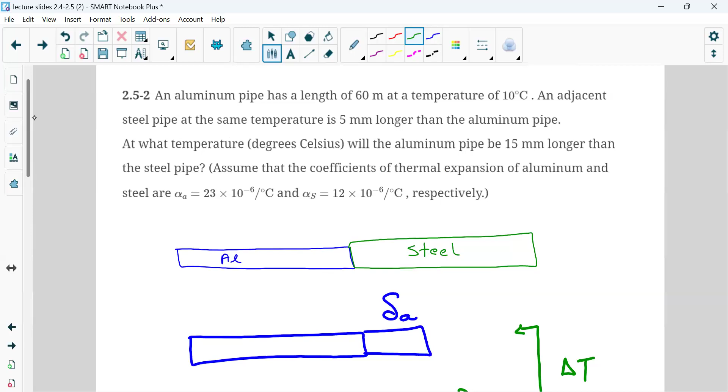We're given a starting temperature of 10 degrees, so our delta T is going to end up being 30.31. Delta T, here's the answer to that question, is going to be T final minus T initial. So that means 30.31 is then going to be T final minus 10. So my final temperature for this to happen is 40.31 degrees Celsius.

All right, I don't think these are that bad. When they get bad... actually that one's not going to be bad either, is when we put the walls in. Do we put walls in?